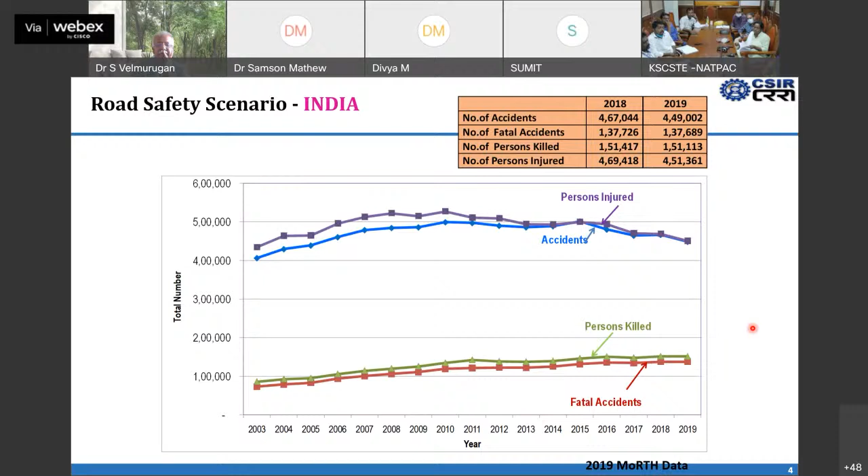That means the crashes may be coming down, but if a crash is occurring, that invariably results in more fatalities. Though the number of crashes are less, or even persons getting injured is somewhat less, if a crash is occurring, that is resulting in more deaths.

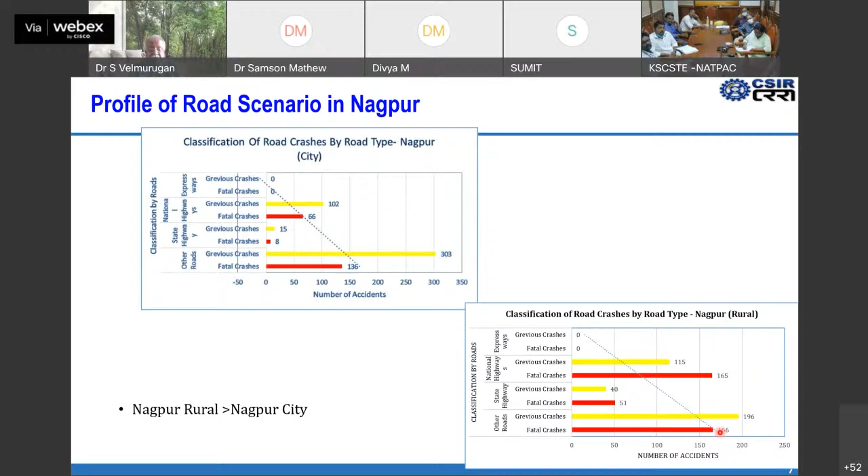These are the black spots identified as per the MORTH protocol, which we have identified from MORTH, the protocol of 2015, which stipulates that if 5 crashes have happened during the last 3 calendar years or 10 deaths have happened, that particular location is called a black spot. That is the present definition available with us, because the IRC document is not yet released, so we can't comment on it.

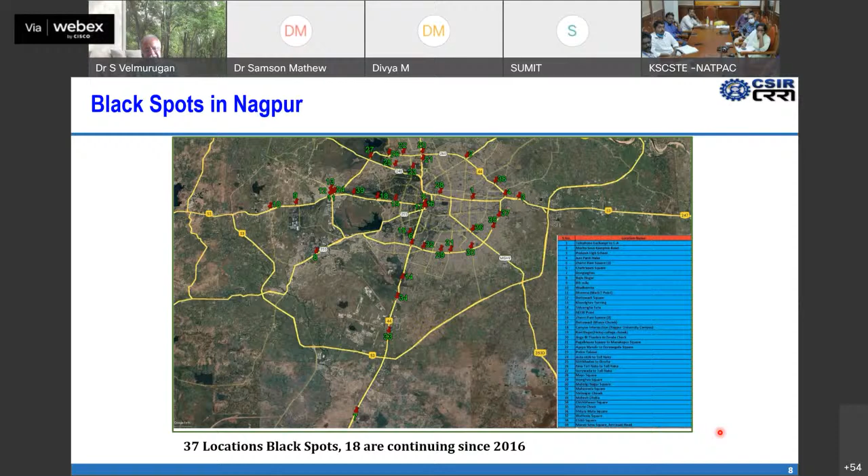But generally, this is the way a black spot is expected to be classified. So based on that, we have considered data from 2019 to 2021 to identify the black spots in the entire city of Nagpur, that is the city and suburban limits up to the metropolitan area.

For this project overview, when we were given this task, we thought we would go for implementation of a holistic safe systems approach by taking on board artificial intelligence as a tool for up to 50% reduction in road crashes or fatalities in the city of Nagpur, leveraging artificial intelligence over a period of 2 years. Once the things get implemented by 2025, we expect it can be brought down. Our project will end by 2023, and by the time some of the measures get implemented, we can expect some reduction.

So as I mentioned, there are 3 vectors: vehicle safety, mobility analysis, and infrastructure safety. The vehicle safety part, because it's a pilot study, becomes doubly difficult to use for other forms of road transport like personalized cars or taxis, though we attempted some taxis to put this kind of tool.

I'll be showing the mobility analysis based on this vehicle safety, imbibed in this artificial intelligence tool, which would allow us to identify locations that can turn out to be black spots, that is, potential road crash prone locations identified based on this advanced driver assistance system. The third vector is infrastructure safety, wherein we develop remedial measures or countermeasures for identified existing black spots, as shown in the previous slide, along with continuous monitoring of road assets.

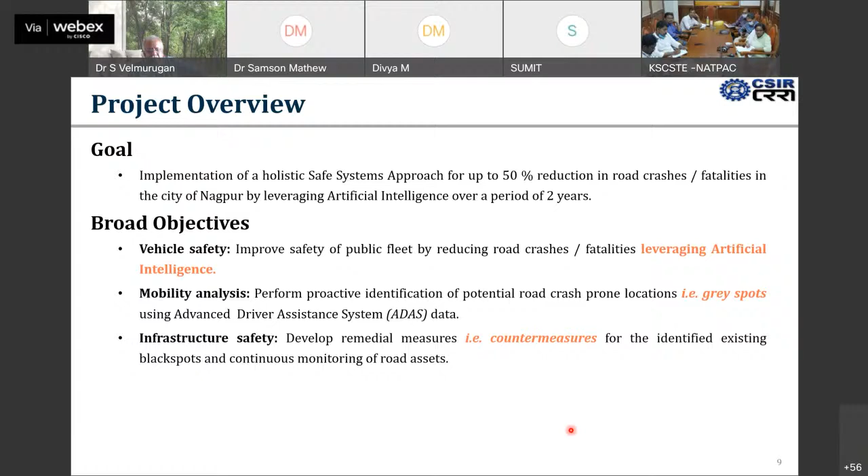This is the current stage of the project, where we have identified the locations and CAS alerts are coming in for about 250 buses. 50 buses were installed, and I'll be talking about those 50 buses in this presentation. 200 more buses have this CAS system installed, which I'll explain and show you.

We have done black spot action plans and are in the process right now of handing over data for 6 locations, whatever black spots apply there. We'll finally complete the project with 37 locations where black spots have to be taken on board, and also whatever locations get identified as gray spots over this period, based on collision avoidance system alerts, we'll be in a position to review.

Also, road safety awareness programs, because once alerts come in, we frequently interact with the drivers. These alerts primarily come from the buses, so bus drivers will be sensitized about better management of their vehicle, how they are maneuvering it. If more alerts come in, they'll be sensitized about it. One sensitization workshop was already held, and 2 more will follow to help them better handle their vehicles on the road.

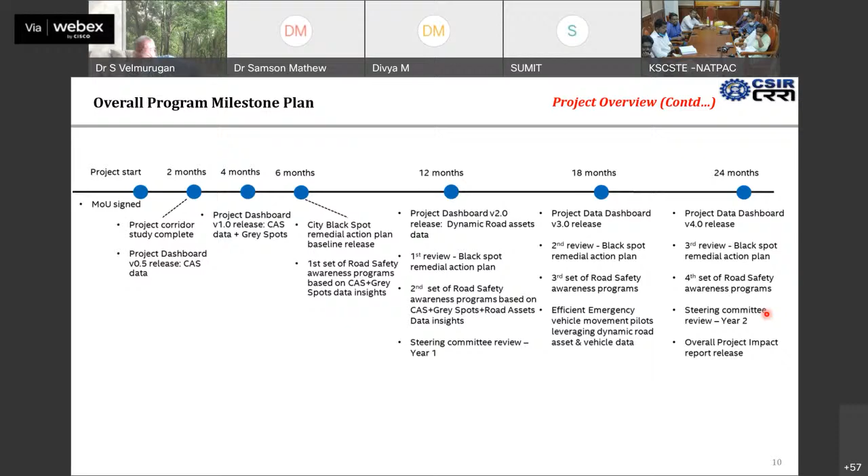As I told you, the drawback is we are using only buses, because buses are the easier way to install this system, and more importantly, in buses the blind spot is much more significant—for the extreme left side, nothing is visible. So these alerts coming in will be quite useful.

This slide is not of particular interest to you. Improving the safety of larger vehicle fleets through safe driving behavior is the vehicle safety aspect. So how do CAS devices improve vehicle safety? Let me show you: timely warnings to drivers for distraction and indiscipline can prevent accidents. From that angle, we are trying to generate these kinds of alerts which typically come in high-end cars.

The same system has been put here, which encompasses forward collision warning, pedestrian collision warning, headway monitoring warning, and lane departure warning, and even signage identification—if a signboard is there, a speed limit sign, that can also be identified.

We have to keep in mind that in urban context, headway monitoring can turn out to be superfluous, only because in the Indian context, due to traffic heterogeneity, HMW alerts become redundant as vehicles pack one after the other, and two-wheelers tend to go right near another vehicle.

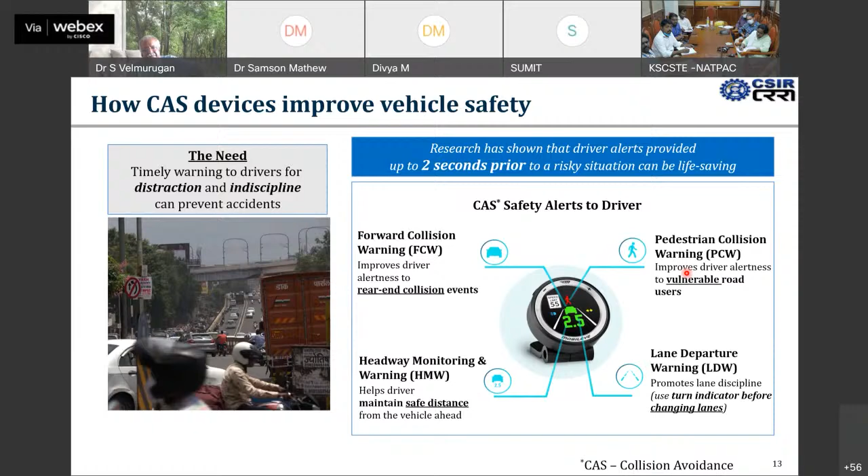So how the system is installed, just for your knowledge—there is a camera focused on the road, and a display unit which is about 7 inches, along with an audio alert that comes within the cabin, so whether it's a forward collision alert, pedestrian collision alert, headway monitoring, or lane departure warning, everything comes through.

Prior to that, we utilized the Vienna system. This system gives us how the person is responding to the stimuli. We analyzed this to understand how the person generally behaves when using the road, both prior to and after using the road, studying visual stimuli as well as audio stimuli, to understand how drivers are actually behaving.

These alerts keep coming and get analyzed, with post processing done subsequently. We don't try to do the processing live—that is not required here. We are supposed to have the data available with us, then do the analysis and come out with results.

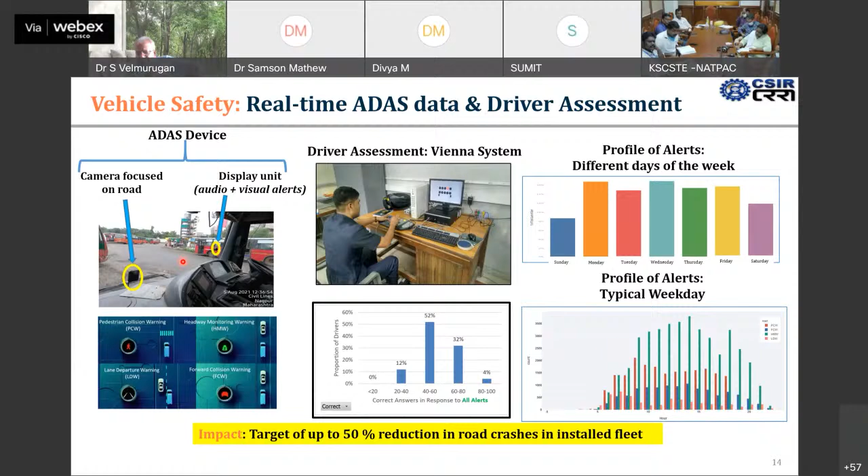This is the way we are expecting things, and as for the methodology, basically we try to have control periods. A control period is one period where the driver is not sensitized about the safety alerts, but we will be doing post processing of the data. That's how we had that kind of setup.

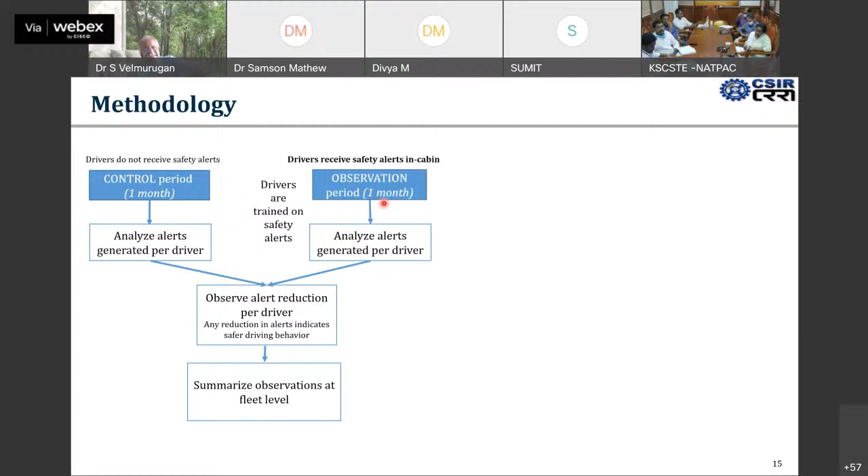We try to understand how, without the alert, the driver is behaving. When the alerts start coming, we had two periods we analyzed, trying to understand how the driver would behave for each of the various 4 alerts given here.

In this overview, in phase 1, 75 routes are covered and 80 kilometers per day per driver is driven, with over 3 lakh kilometers of data analyzed. Post processing—I use the word again—typical fleet operation data was used from 5 a.m. to 11 p.m., with 1 month of observation to allow for sufficient randomness.

As I told you, the major alert is HMW, which we have totally neglected—I told you the reason already. Our concern was to mainly utilize pedestrian collision and forward collision alerts.

Lane departure is also something which should be taken on board, but because of the bigger vehicle, the lane departure happening might be somewhat insignificant. If it's a car, lane departure would be much more significant. Also being an urban road, how much of a parameter that would be, we didn't want to utilize it—that's why we zeroed in on using the pedestrian collision warning and the forward collision warning.

And safe behavior of the drivers, with improved safe driving behavior, we try to go about understanding this. Amongst the 50 drivers, as I told you, both control period and analysis period were taken on board. And we found that...

The highest alert reduction was observed for the pedestrian warning, because we found about 43% reduction among improved drivers. We conducted a training program for them to understand the benefits of it. During the control period, we didn't tell them. After that, when we gave them the sensitization, we found people responding in a much better way.

Overall, if you take HMW also on board, 48% of drivers demonstrated improvement in safe driving behavior, which we targeted to reach at least up to 70%, so that the alerts will stop tipping.

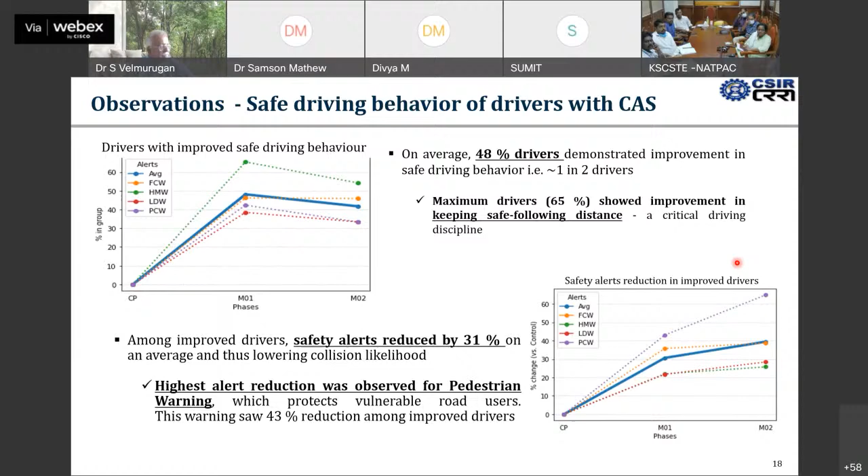The maximum drivers showed improvement in keeping safe following distance. That is what the FCW we wanted improved, because pedestrian alerts may not happen everywhere - only the jaywalking aspect may happen in the mid-block section of the road, or at junctions where the pedestrian is trying to cross in a hurry. So these are the two scenarios where we may expect more pedestrian alerts. But for the rest of the period, forward collision is an important part, so we tried to address it.

As I told you, the training program was conducted. 345 drivers were sensitized, and our endeavor now is to train 1,500 drivers, wherein other than the general training aspects - which we partnered on with Ashok Leyland Institute for Driver Training and Research - we have tried to explain our project iRASTE, which has 5 distinct alerts along with the speed sign and all those things, and all the benefits of it.

The next step in this regard is that 350 vehicle NMC buses will be done, and we are already doing it now. 150 is already complete, so that is an old one.

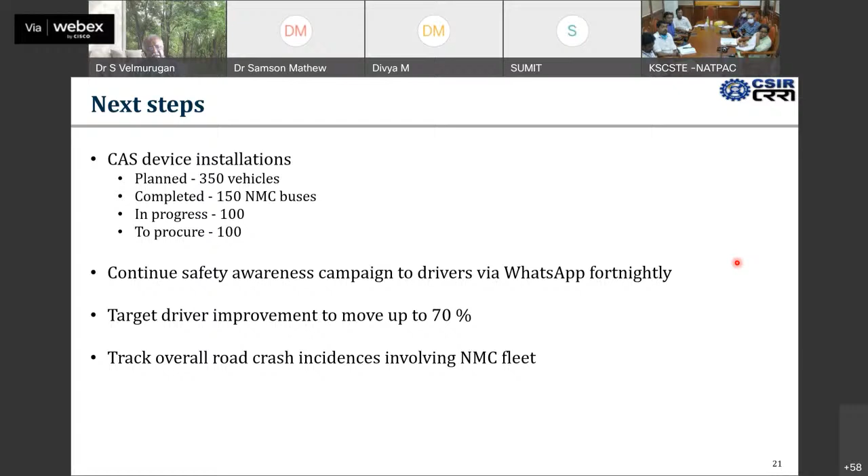So now we are also trying to keep them in a sustained way. We made a WhatsApp group, fortnightly, in Marathi, so that they will be in a position to improve this driver improvement up to 70% and track overall road crash incidences involving the NMC fleet. That is also important, because we try to do it in our own silos, without trying to understand whether the crash scenario involving buses is dipping or not. So we are also trying to relate it with the FIR data.

The second part of this vector, as I told you, is mobility analysis. With this data coming from the alerts, which we are calling the gray spot, we are trying to utilize this gray spot identification. This is a small methodology we developed, wherein the FIR and the black spots are also calibrated - the black spot data was calibrated to see whether that location is giving the same kind of alerts or not.

As I initially showed you, 16 locations are still remaining as black spots since 2016. So for those locations, we calibrated whether, when the bus is passing through, this kind of black spot alerts are coming or not. And then we went in for the CAS alerts, as I told you - two major things: forward collision and pedestrian collision.

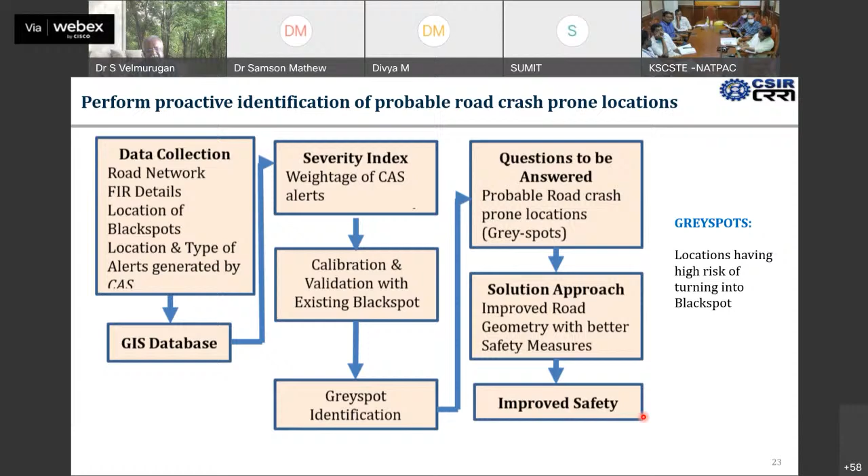They have been given the weightage, and then we went about understanding it to arrive at the gray spots. This gray spot identification for the entire 1,575 kilometers has been geocoded, but right now only 50 buses running in some sparse network were taken. Once we put it in 350 buses, we may cover the entire city to a large extent. The geocoding has been done for 1,575 kilometers, covering junctions and similar features. As I told you, 37 black spots and the FIR locations are spread over the city for the period of 1st January to November 21.

During this operational control phase and operational phase, we have done this for the first 50 buses, and similarly we are doing it for the next 200 buses now.

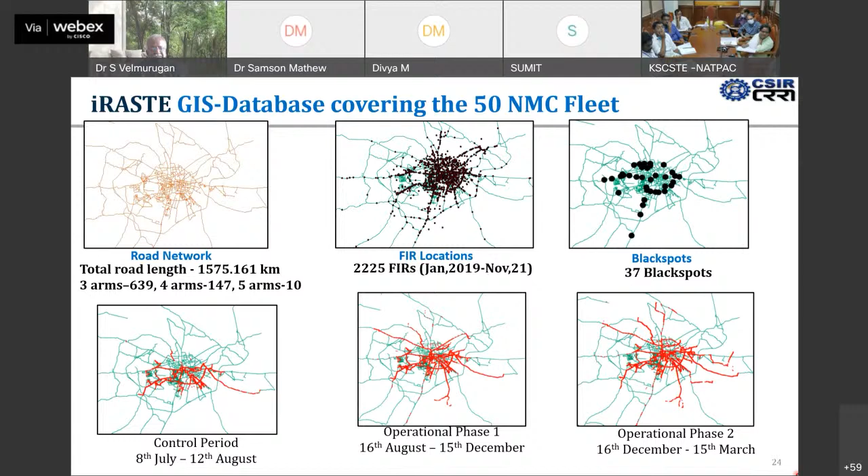For the FIR analysis, we tried to understand from the FIR, which is translated from Marathi to English, what sort of major and minor crashes are there, and also vehicles involved with pedestrians, which we expect in any city, ranging between 65 to 90%. That is true in this case also. About 67% of the crashes involve vulnerable road users, and here even the autos are not included. So that is a big cause of concern.

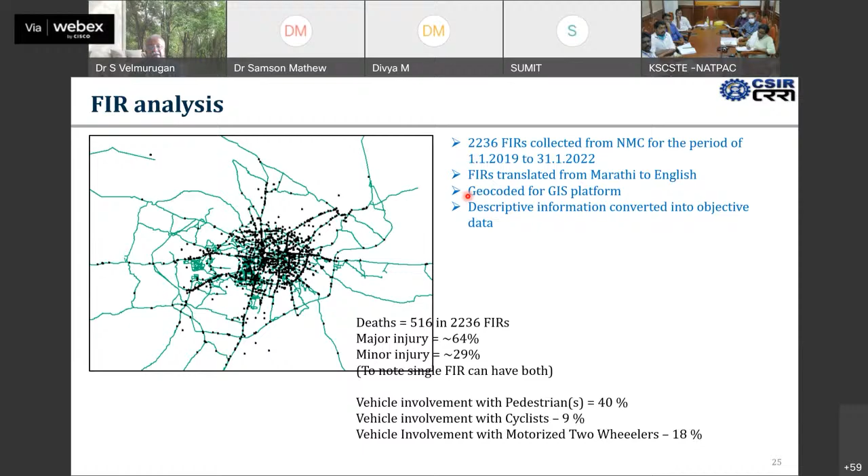Our target is to involve the buses right now, because we are not putting this CAS in other vehicles. For identification of gray spots, as I told you, we took the PCW and FCW. Based on that, we identified about 20 locations in these 36 routes having the problem. These locations could turn out to be a black spot in the foreseeable future.

This could be due to intersecting norms issues, lane width issues, divided carriageway, unsignalized intersections, absence of free left turns, unchannelized movements, presence or absence of street lights, and missing markings. These various issues identified at the locations, we are trying to understand.

We have also done comparison of the alerts during the 3 phases - the control phase is one where drivers are not intimated, while in operational phase 1 and 2, they are intimated and also given training.

We found this PCW is one thing where near the black spot issue, there's actually a bigger occurrence happening during the 3 phases. But in operational phase 2, during night time, we found it is somewhat lesser in certain phases, with fewer alerts coming.

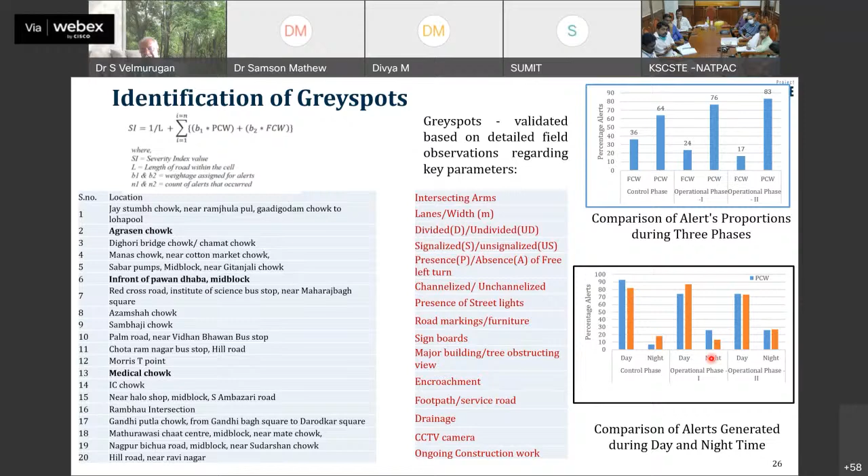The alerts which are coming need to be ground cross-checked also. So that way we found these locations, whatever ranking is coming, what is the real problem on the ground. We visited these locations, and then we will be in a position to give the engineering measure for that location, so it will not turn out to be a black spot in the foreseeable future.

This is a data sheet which gets maintained there. As I told you, another parallel activity we are doing is the road user opinion survey.

This survey aims to understand road users' concerns about the different facilities given to them, with specific targeting of vulnerable road users - pedestrians, cyclists, and two-wheeler drivers. We tried to cover about 66 and 34% of the male and female population, and 45% of people feel they do not get a safe waiting area before crossing the roads.

This is one of the major issues. We try to address that location by making it a depressed median, and if it is a junction area, it should be given a raised curb and concrete guard poles, so that people will feel more secure crossing the road.

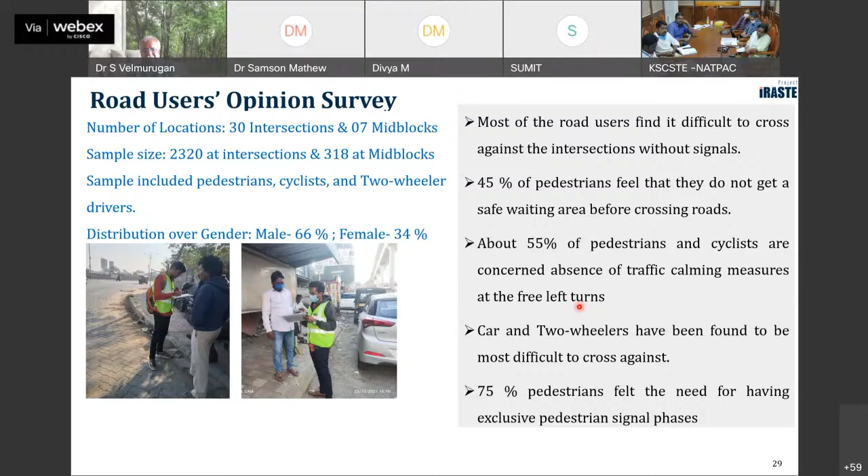Speed tables can really give a lot of relief for the traffic which is moving, as well as for the people who are crossing the road. Cars and two-wheelers have been found to be most difficult to cross against, probably because the speed of these vehicles is much higher. At major junctions, 75% of the pedestrians felt the need for exclusive pedestrian signal phases.

Lastly, infrastructure safety - 37 locations have been identified, based on the crash data of 3 years. We try to utilize the previous CMP reports also to analyze whether there is any trend, and interact with the traffic police and other NMC officials, and alternative countermeasures to be developed.

So this is the thing I mentioned - again showing 37 locations, not 38, 37 black spots. 18 are continuing since 2016, meaning 18 were identified in 2016 itself by the various road owning agencies. They have not, till today, been rectified to the extent possible. That's why it continues to be shown.

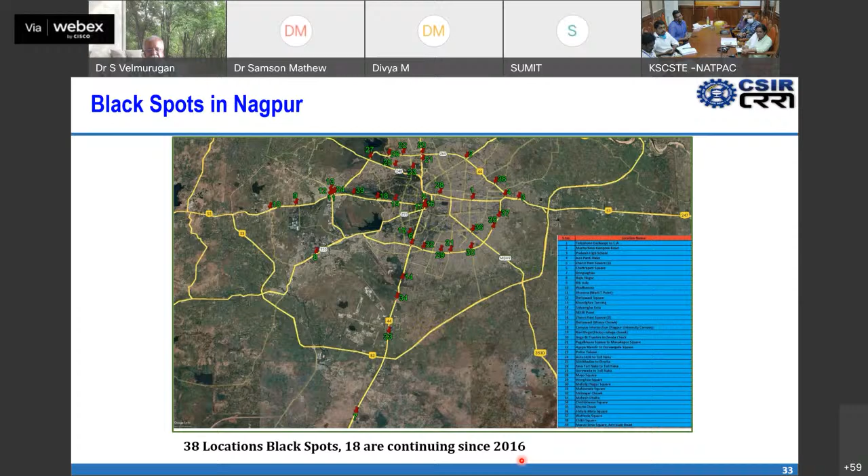That includes 9 mid-block locations and 28 intersections. So here what we targeted is in the intersection area, 250 meters from each approach arm of the intersection, we try to give a generic comprehensive traffic management plan, as well as the engineering improvement plan.

In the case of mid-block locations, 500 meters on either side of the road, because as you know, the way our data gets recorded for the FIR is not foolproof in nature. So we try to cover a 500 meter stretch on either side. About a kilometer of full geometric design improvements are given.

The most common issues identified in these locations are basically the traffic signal pole on the extreme right hand side. That is really a problem which becomes very difficult for the traffic moving on the left lane to notice. And the absence of traffic appurtenances like road signs, markings, delineators, unsafe construction zones, obstructions on the footpaths.

You can see the various kinds of obstructions, and ill-maintained, poorly designed islands - no depressed median for people to cross, and wide open areas lacking design. You can see such a big area made with interlocking block pavers without proper channelizers. Also the junction area has too much openness, making it difficult for negotiating traffic to pass through, as there are no channelizers which are essentially required but missing.

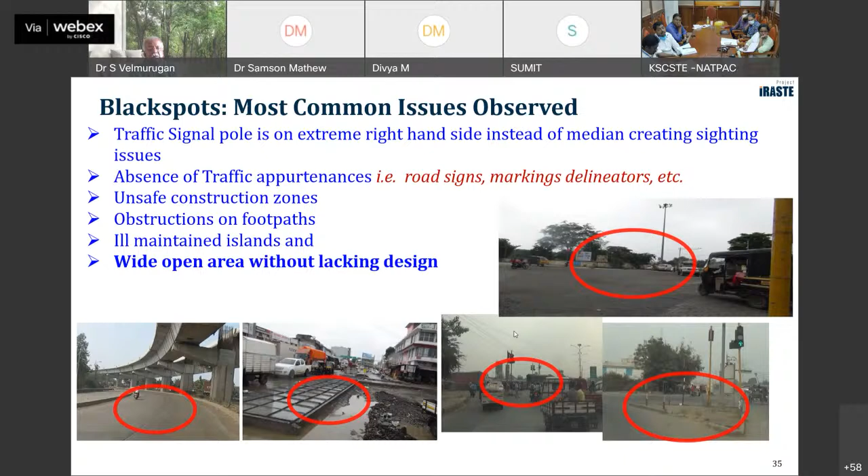I'll show you typical design improvements we have done, which everybody must be doing. We found this kind of location - two typical locations I'm giving. Channelizing treatment for pedestrian crossing is missing. Continuous footpath is missing. Soft traffic calming, the free left turn, is missing. Edge line zigzag marking is missing. And road signs, all types, are missing.

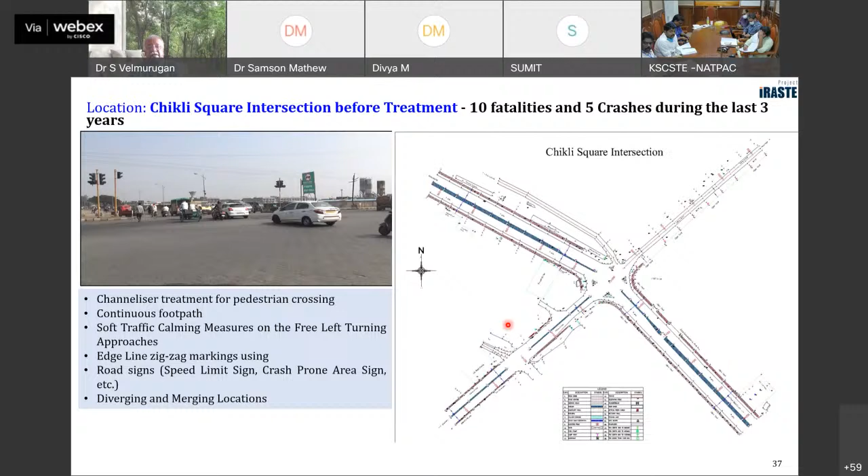Diverging and merging locations - this is the actual ground survey plan. For all these 37 locations, we have done the physical survey plan. We had to get it done because none of the road agencies were able to have that, and traffic data was collected at these locations for about 12 hours duration to understand the traffic profile and composition.

Obviously, two-wheelers are the major dominant vehicle type, occupying between 60 to 75% in many of the locations. Out of 37 locations, we did it in 21 locations, because some locations are somewhat nearby, so the traffic characteristics and scenario remain the same. So 21 has been effectively identified, and there we are done.

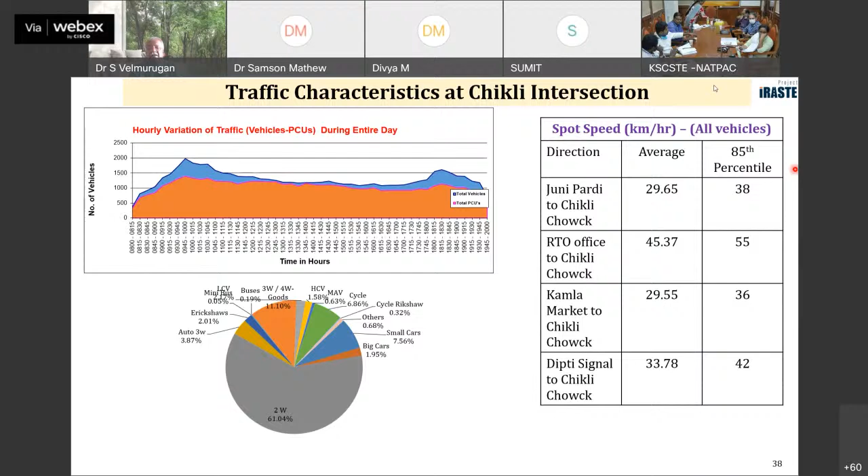And the spot speeds of the mid-block locations also we did, at certain locations, to understand the average speed and the 85th percentile speed.

In certain locations we try to develop a couple of options. This is one such location, the Chikli Square intersection, a conventional signalized intersection where we try to provide channelizers with a depressed median as well as a safe avenue for pedestrians to cross at the intersections with a pedestrian signal phase, along with signboards, markings, and the intersecting left-in-left-out roads or other roads meeting at turning locations.

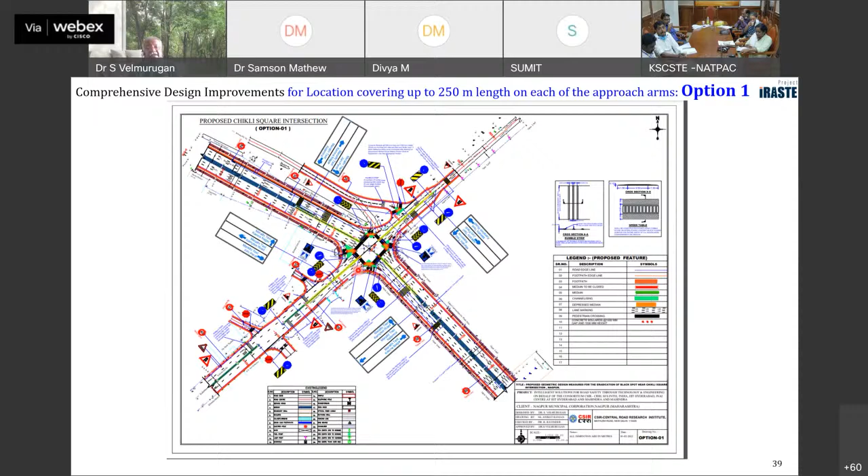Such conventional designs are given, and in certain locations where the right of way is available, we try to illustrate this for the road owning agency people to understand, using 3D representation to make it clear.

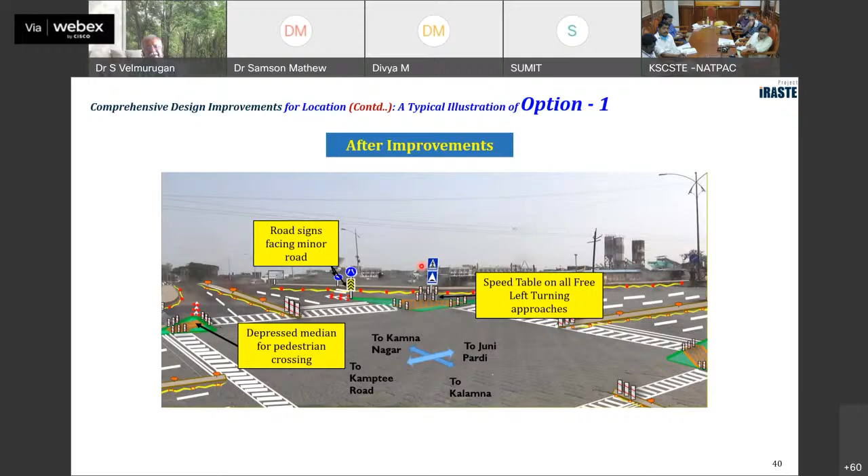A speed table has to be given on all the left-turning, free left-turning approaches, and you can see how the road will look for them to understand. Crash-prone zone signboards and other things expected to be on the ground have been put in, and zigzag marking has been done so the hazardness of the area can be properly delineated.

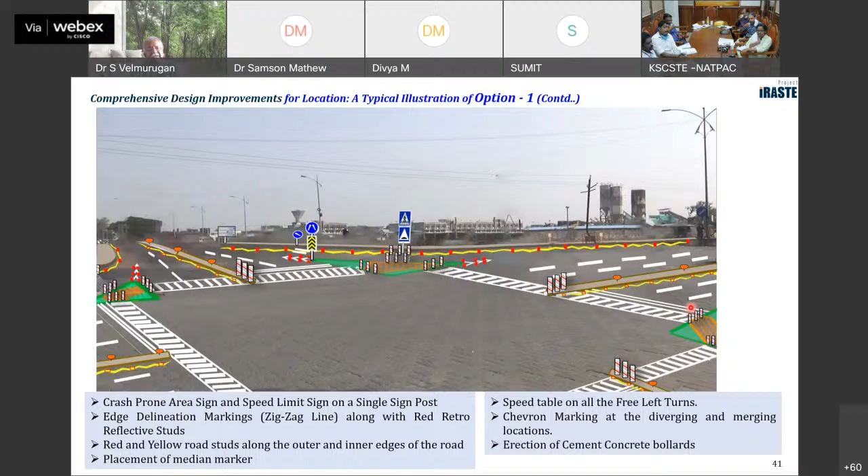In this particular Chikli Square, because the right of way is available, we have gone in for left-in-left-out, meaning closure of the median, and tried to give a U-turn on either side of the major approach, considering the turning traffic flow is dominated by cars and two-wheelers, with only 1% maximum buses during peak hours. The median opening given was 12 meters, with the U-turn opening given an extra 1.5 lanes on either side, so we can accommodate moving through traffic.

Also, when we provide a U-turn, the conflicts get reduced from 24 to 8. So this is one such location where that possibility exists, and that's why we have given it.

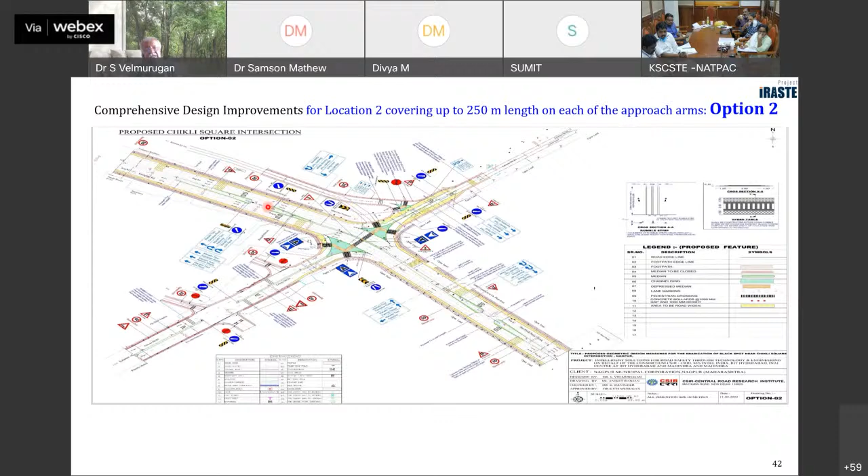We also give pedestrians a location to cross with a proper signal phase at the center of the intersection, an exclusive phase for pedestrians. We have demonstrated this for the road owning agency to understand how good this kind of plan can be, with transverse bar marking put up front, among other things.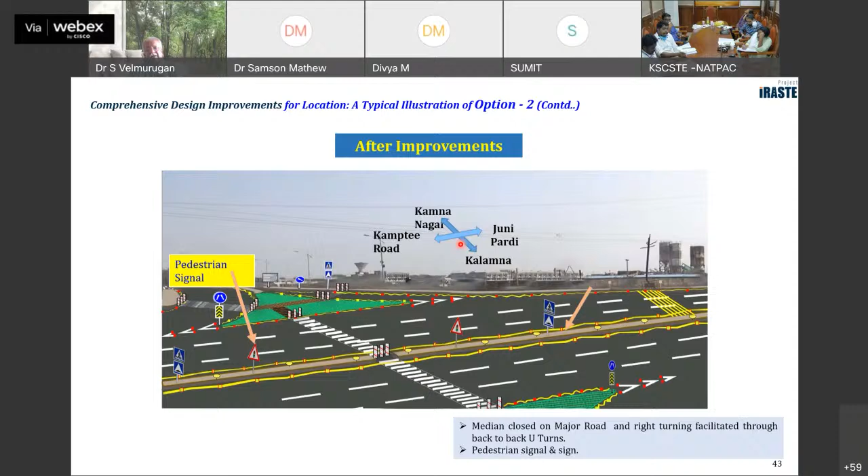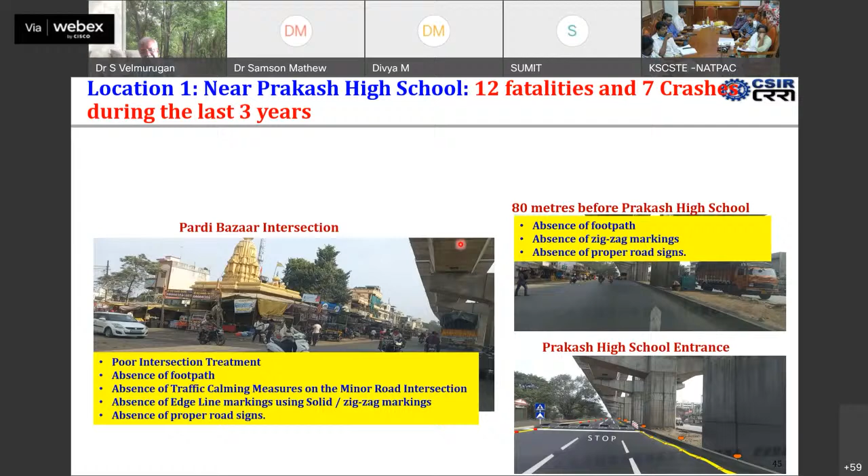Similarly, for mid-block locations, one example: this is a location where 12 fatalities and 7 crashes occurred during the last 3 years. The junctions have some problems, with a minor junction passing through this mid-block area, and the school in front of it has an issue. So before and after the school, this is the base plan of that 1 kilometer stretch, 500 meters on either side of Prakash High School.

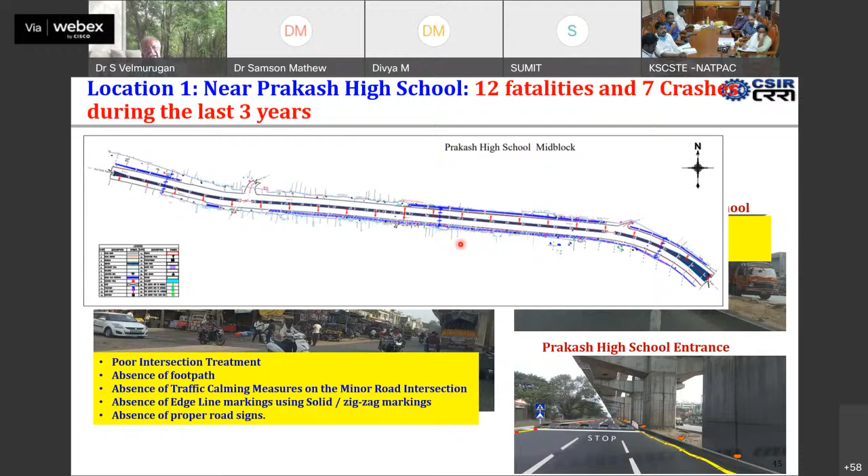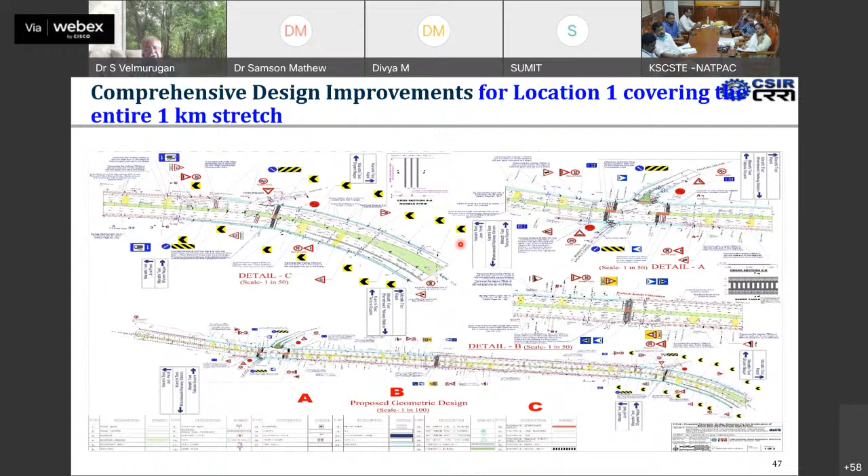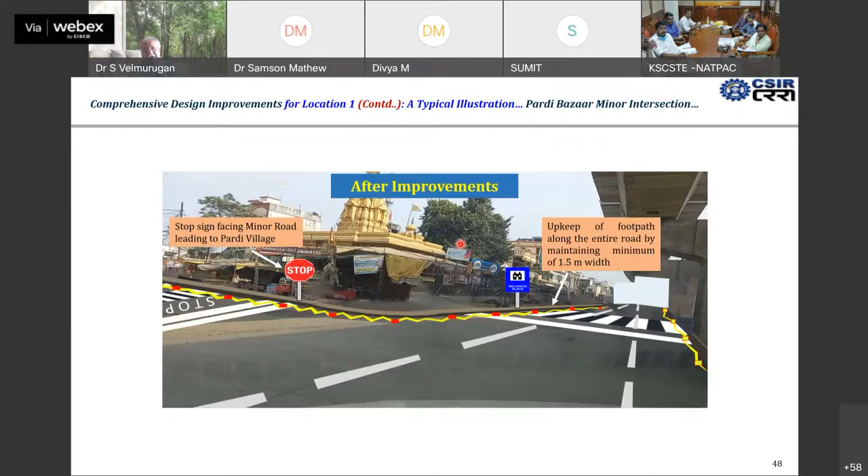This is also replicated for minor junctions, showing what sort of facilities need to be provided on the ground, replicated on the photo itself. Similarly, where a metro line is going on, zigzag marking or median markers and other things expected to be on the ground have all been delineated and shown to them.

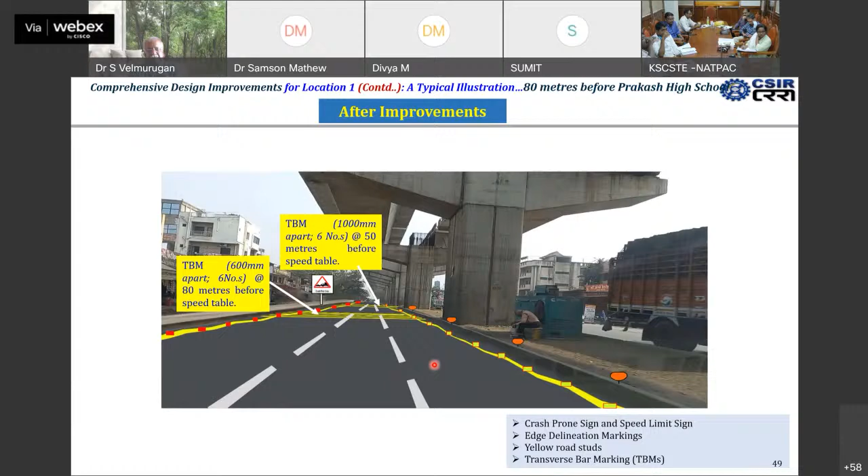Similarly, at the school area, the speed table has been shown at that location along with the proper signs and markings.

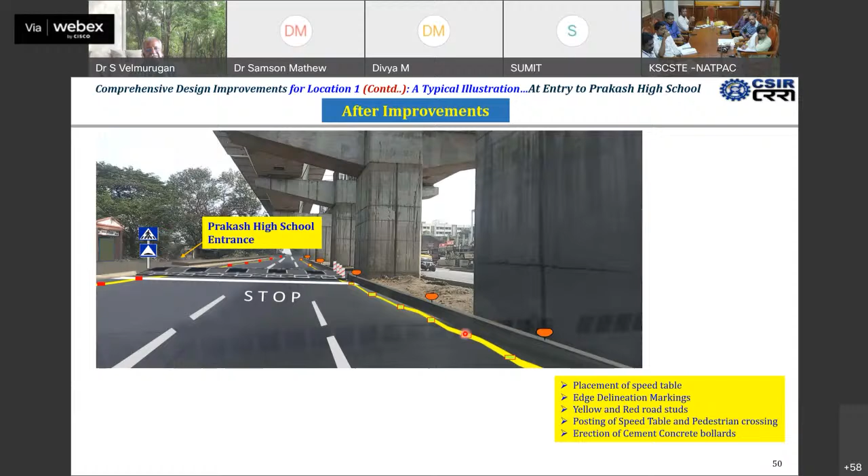Next steps: we have completed 6 so far, and our team is handing over these drawings to them, with 31 more to be completed in the next 3 months. The broad action plan is to provide an action plan for all 37 black spots, and 5 black spots will be considered for educating and equipping volunteers with life-saving kits, through an NGO initiative that Intel is trying to do.

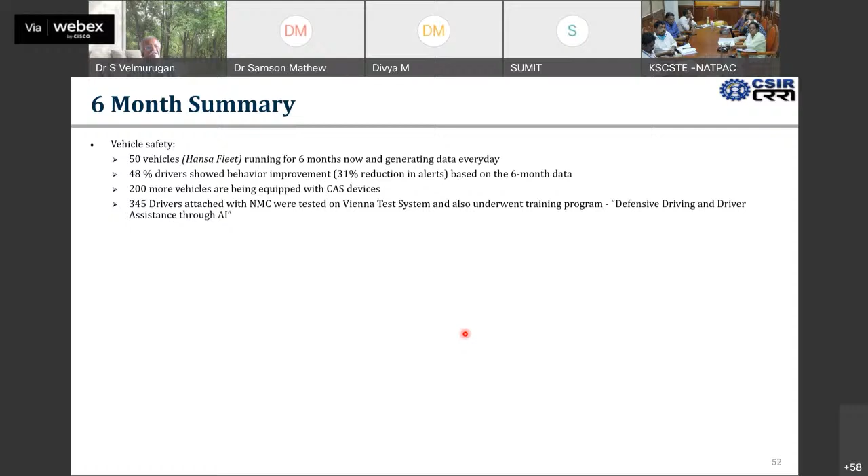The 6-month summary: we have done this already. 50 vehicles have been equipped with this system, 48% of drivers have shown improvement, 200 more vehicles are being equipped with CAS devices now, and 345 drivers have been given the Vienna Test System and undergone the training program.

For mobility safety, we identified 20 gray spots, and an NGO has been partnered to give awareness, and real-time gray spot analysis is being done.

For post-processing, an integrated GIS database, as I told you, for 1,575 kilometers has been made operational, so that data can be utilized by anybody, and we are just maintaining it. It is made at Triple IT Hyderabad.

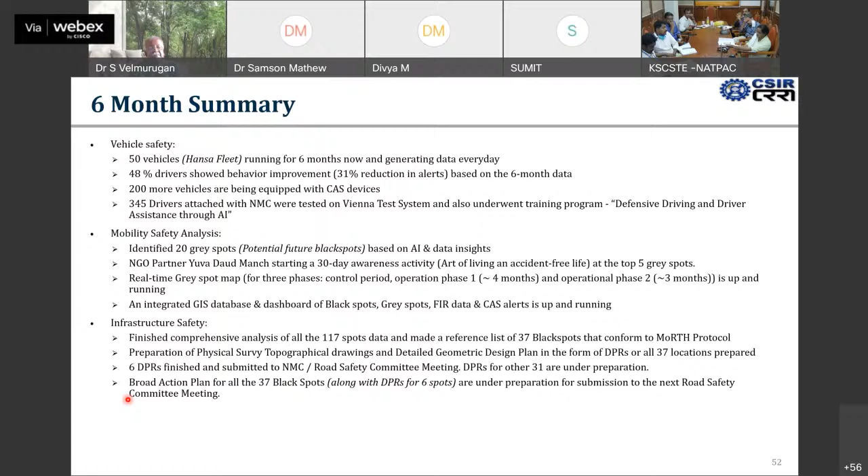For infrastructure safety, as I told you, from the 117 spots of data, we identified 37 as black spots. A topography survey has been done for all 37 locations, 6 DPRs have been completed, and broad action plans for the 37 are being handed over.

Now we intensify the driver awareness campaign, which we are going to do next August, and target driver improvement to move up to 70%, because right now it is only 48%, and monitor incidences of road crashes, and expand gray spot related on-ground action plans.

As I told you, 20 locations have been identified. For those, we'll be giving engineering improvements, similarly, so that it will not turn out to be a black spot in the future.

The black spot remedial plan implementation basically has its onus on the road owning agencies like NMC, NHA, because the Honorable Minister is behind the show. There is every possibility that during the road safety committee meetings, which he himself chairs every 6 months -- he doesn't take the 3-monthly meeting, but every 6 months he does, because he represents that constituency.

He will be able to drive it through to get it implemented, and develop the road safety index and road quality index -- that is another module which we are going to attempt. This project was launched on 11th September 2021 by the Honorable Minister. Right now the project is up and running. Thank you.

Sorry, I took slightly more time. Fifty minutes, no problem, excellent presentation. Okay, thank you. Now it is open for discussion.